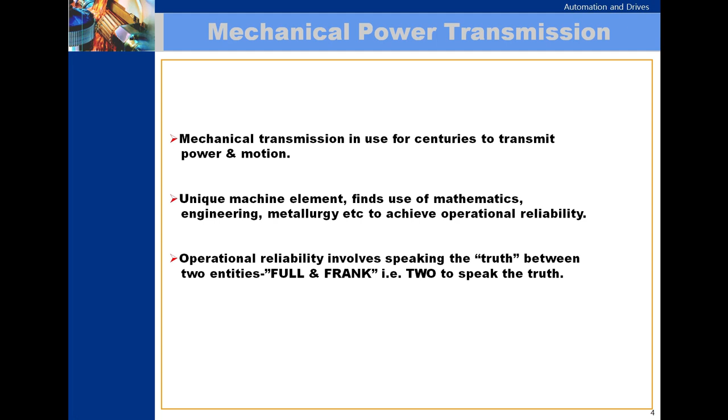Gearboxes service, maintenance and condition. We will see in this video the topics of selection, operation and maintenance. Mechanical transmissions have been in use for centuries for transmitting power and motion. This unique machine element makes use of mathematics, engineering, metallurgy, etc. to achieve operational reliability.

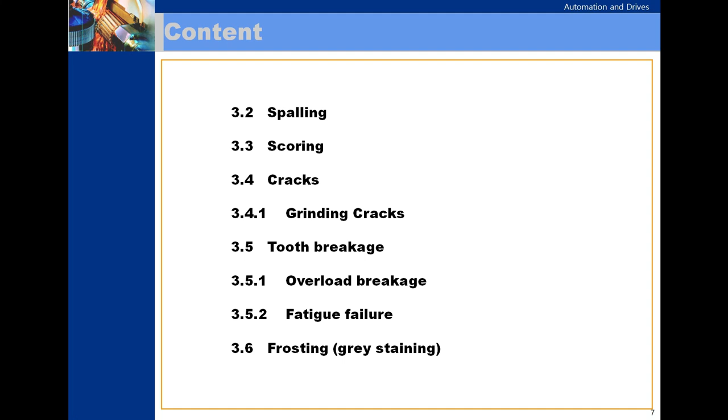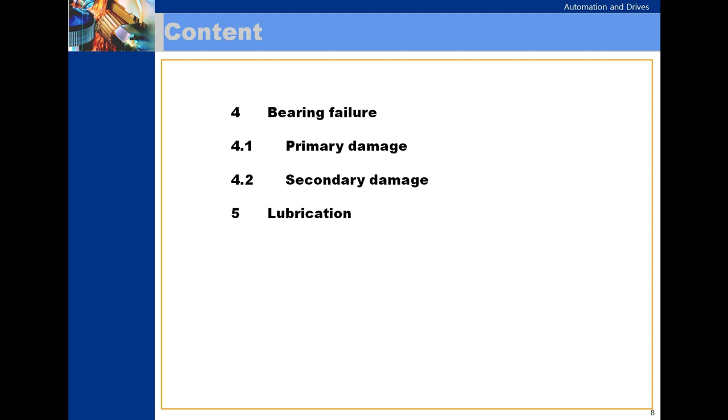Operational reliability involves the full and frank truth between two entities. The main topics here are failure analysis, gear contact patterns, gear damage, pitting (initial pitting, destructive pitting, secondary pitting), spalling, scoring, cracks, grinding cracks, tooth breakage, overload breakage, fatigue failure, frosting (gray staining), bearing failure, primary damage, secondary damage, and finally lubrication. Basic criteria for proper selection of gear units are mechanical rating, thermal rating, bearing lifetime, type of lubrication, special requirements, and other accessories.

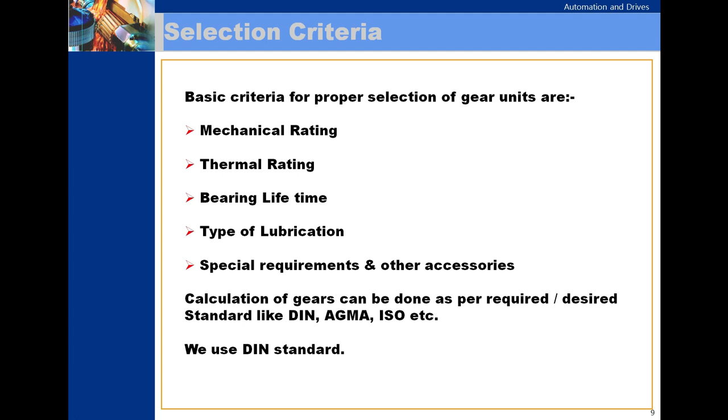Selection as per mechanical rating requires data such as type of prime mover, type of driven machine, daily service and duty condition in hours per day, motor power in kilowatts, motor speed in rpm, output speed in rpm, the service factor, starts per hour, actual or effective output power in kilowatts, relative position of input or output shafts, and handing of gear units.

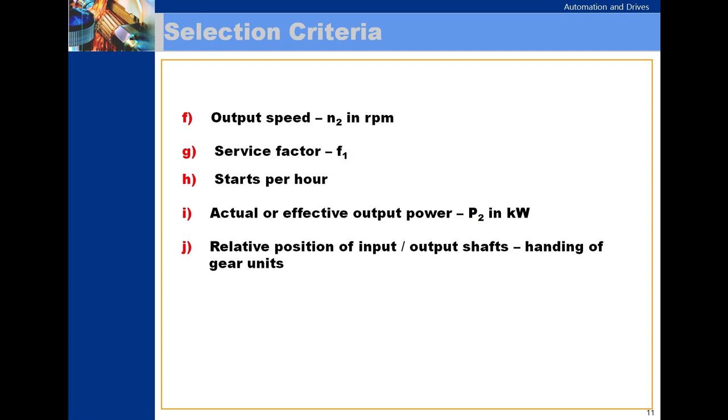Selection as per thermal rating requires data such as ambient conditions, open space, small or large premises, ambient temperature in degrees centigrade (minimum and maximum), operating cycles per hour in percentage, and wind velocity.

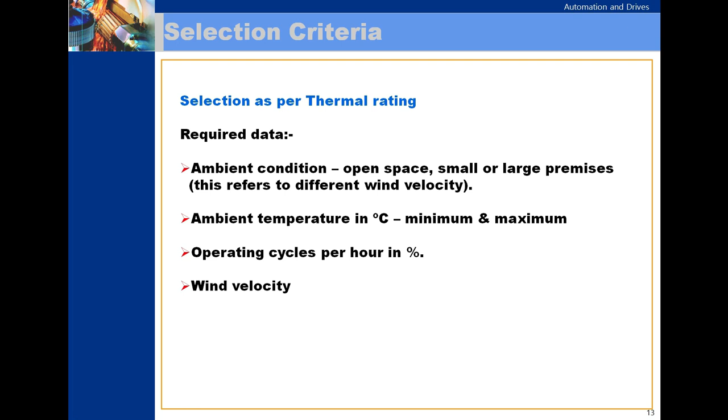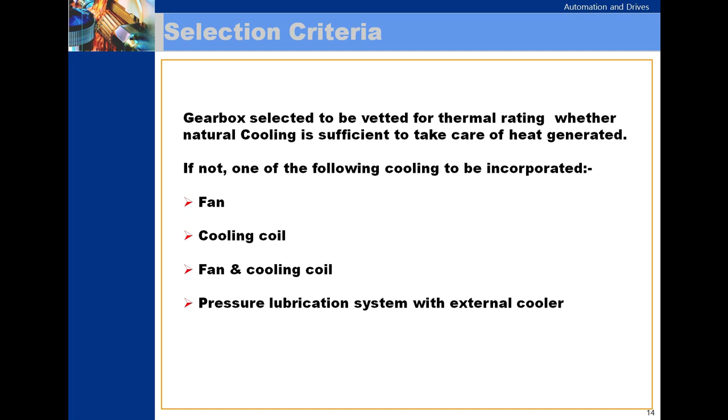The gearbox selected should be vetted for thermal rating to check whether natural cooling is sufficient to handle heat generated. If not, one of the following cooling methods should be incorporated: fan cooling, cooling by fan and cooling coil, or pressure lubrication system with external cooler.

Types of lubricant: normally mineral based oil of 320 or 460 viscosity at 40 degrees centigrade. For splash lubrication, 460 VG viscosity oil is used, and for pressure lubrication, 320.

Excess oil leads to churning losses and higher temperature with added pressure on seals. Ideally, temperature should be restricted to 90 degrees centigrade, while safe up to 95 degrees centigrade, beyond which oil life drastically reduces. For every 10 degrees above 65 degrees, oil life gets halved.

Unforeseen load or force and external vibration, if not accounted for during selection, can cause sudden failure, partial or whole. Improper mounting and commissioning will also lead to failures. The following hints will help avoid unnecessary failure.

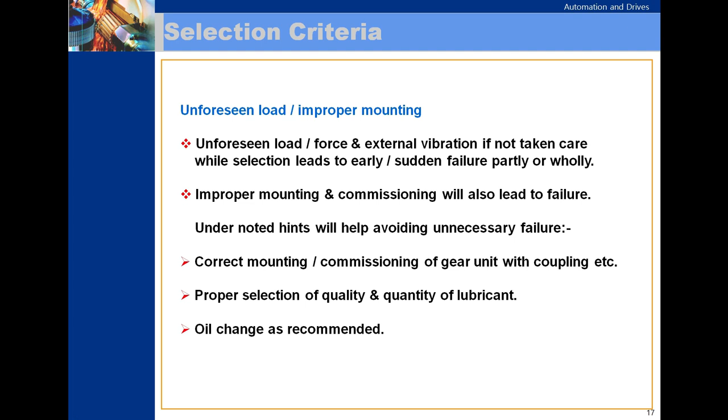Correct mounting and commissioning of the gear unit with the coupling, etc. Proper selection of quality and quantity of lubricant. Oil change as recommended. Regular checks of seals, lubricant, temperature, noise and vibration.

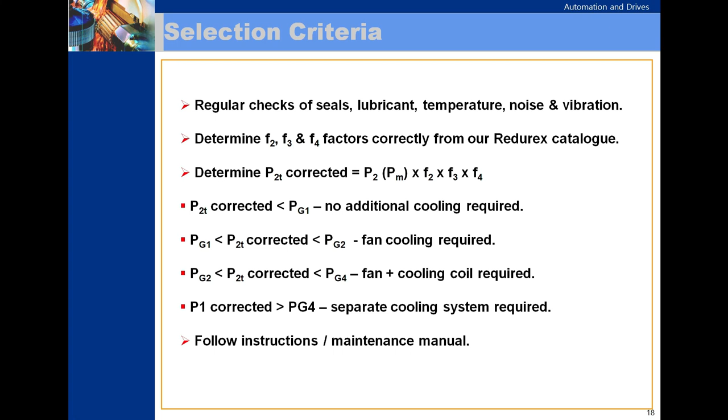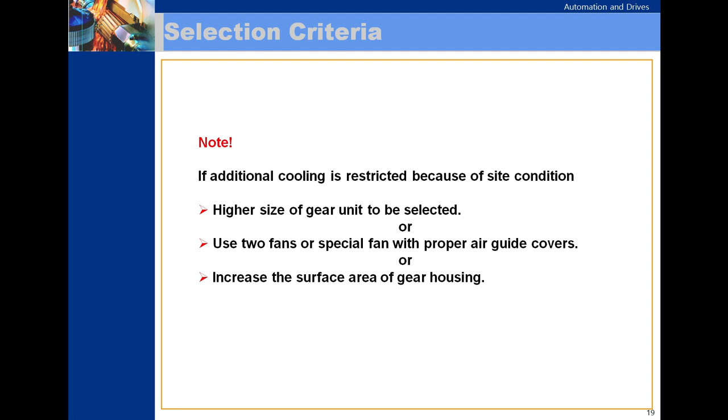Note: if additional cooling is restricted because of site conditions, a higher size of gear unit should be selected, or use two fans or a special fan with proper air guide covers, or increase the surface area of the gear housing.

Lubrication is chosen depending on circumferential speed. Circumferential speed of pitch circle lesser than 15 meters per second means splash lubrication. Circumferential speed of pitch circle greater than 15 meters per second means pressurized lubrication. Note: forced lubrication system is mostly a combination of splash and pressure.

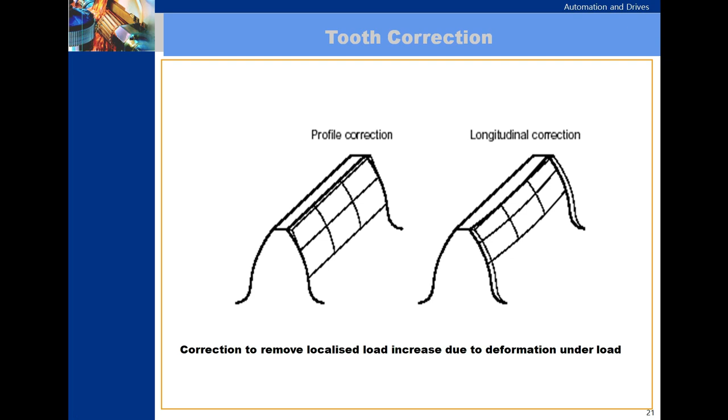Tooth correction: profile correction and longitudinal correction. Correction removes localized load increase due to deformation under load.

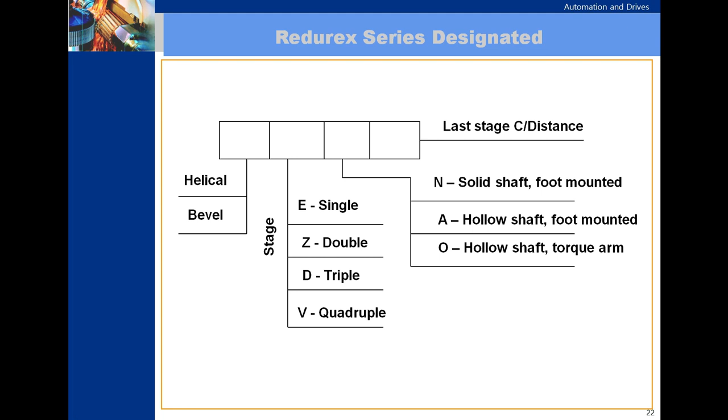The series design nomenclature can be found by seeing the nameplate: helical bevel, E for single, Z for double, D for triple, V for quadruple stage, N for solid shaft, A for hollow shaft, O for hollow shaft with torque arm. The last one or two digits indicate the stage and size, ranging from 1 to 26.

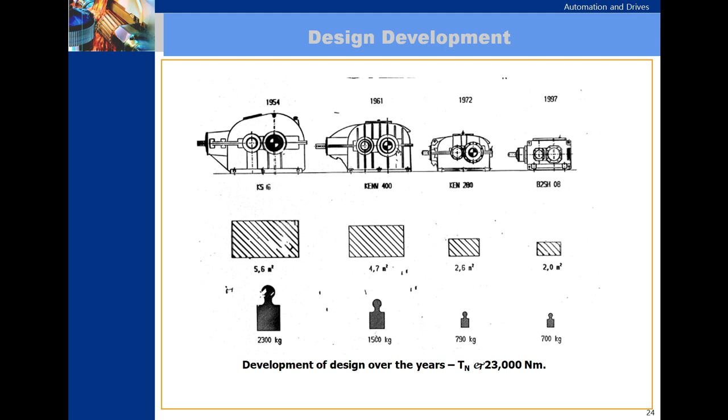Development of design over the years: torque up to 23,000 newton meters. The past tendency prevailing in industry with respect to gearing is to raise power levels to an ever increasing extent while decreasing physical size and using less weight. Improvements were developed by changing tooth profile, using higher quality materials, upgrading surface finish, hobbing with protuberance, using effective heat treatment processes, using other types of lubricants, and so on.

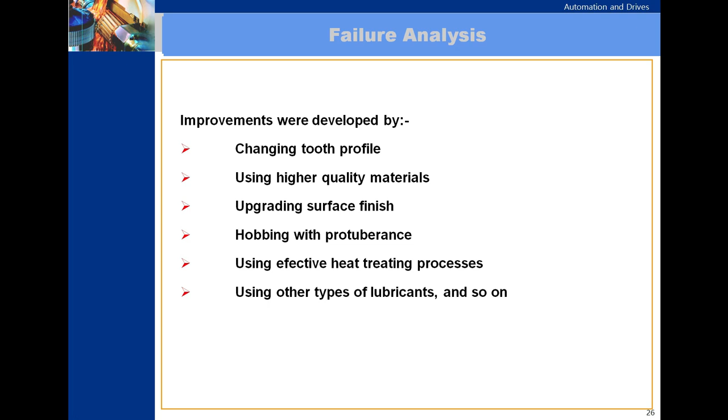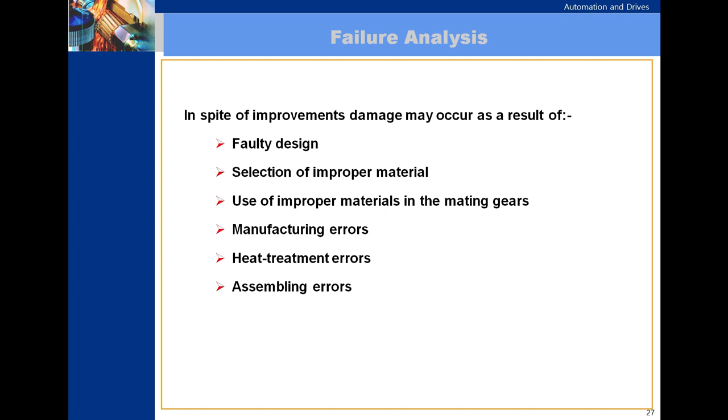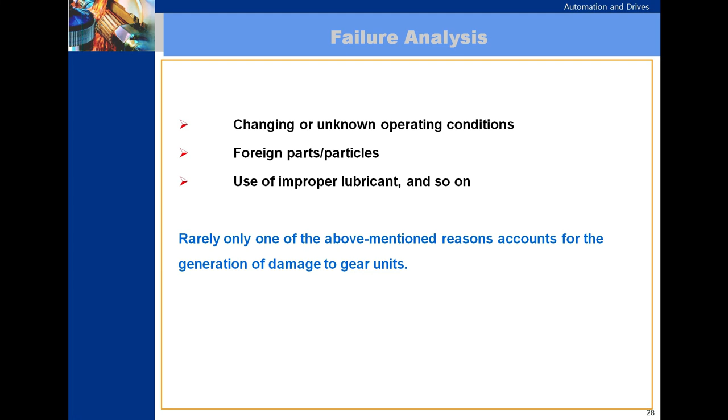In spite of improvements, damage may occur as a result of faulty design, selection of improper material, use of improper materials in mating gears, manufacturing errors, heat treatment errors, assembling errors, changing or unknown operational conditions, foreign parts or particles, use of improper lubricants, and so on. Rarely does only one of these reasons account for the damage to gear units.

Assessment of damage in gearing requires in-depth knowledge of gear contact patterns, gear tooth failure modes, and lubricant systems. Faulty contact patterns develop when load is applied on only one end of the tooth, causing failure due to manufacturing defects, failure during assembly, or adverse effects during operation.

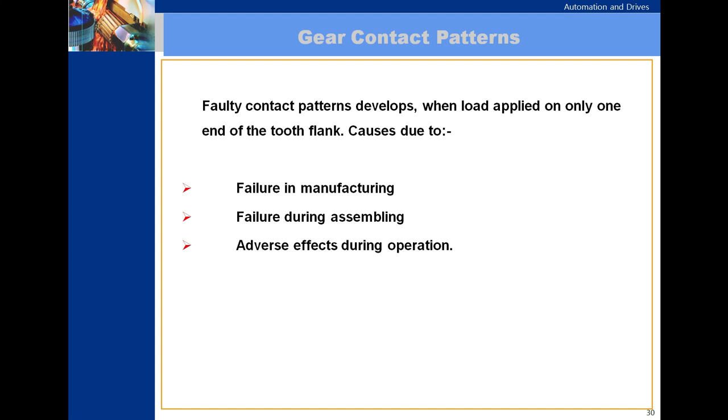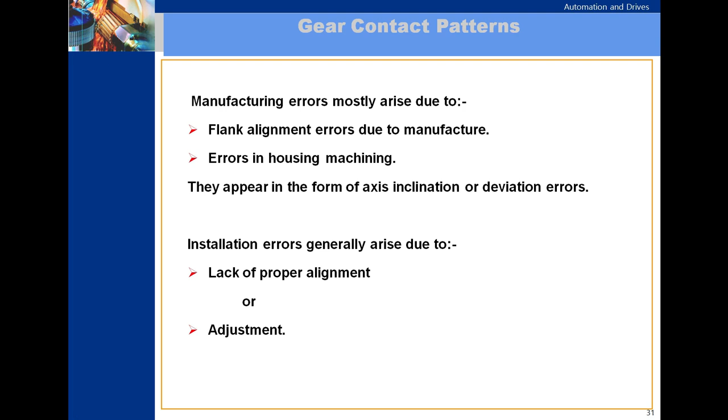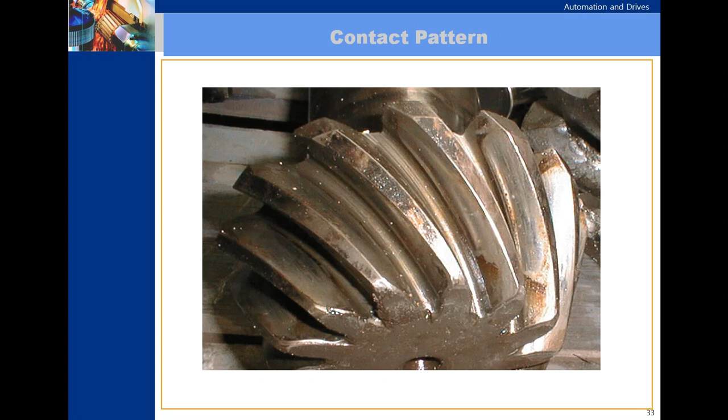Manufacturing errors mostly arise due to flank alignment errors during manufacture, or errors in housing machining. They appear in the form of axis inclination or deviation errors. Installation errors generally arise due to lack of proper alignment or adjustment. Adverse effects in operation mostly involve alignment errors, tension load, or vibrations. In the contact pattern shown here, you can see only part of the tooth flank is worn out, indicating a matching tooth contact issue.

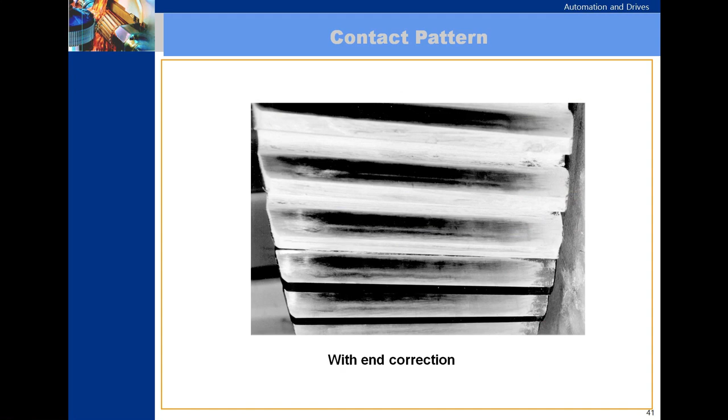Bearing damage. In machines, bearings are among the most important components, subject to heavy demands on their load bearing capacity, and as a result continue to be the subject of intensive research and development. This R&D allows calculation of bearing life to a high degree of accuracy.

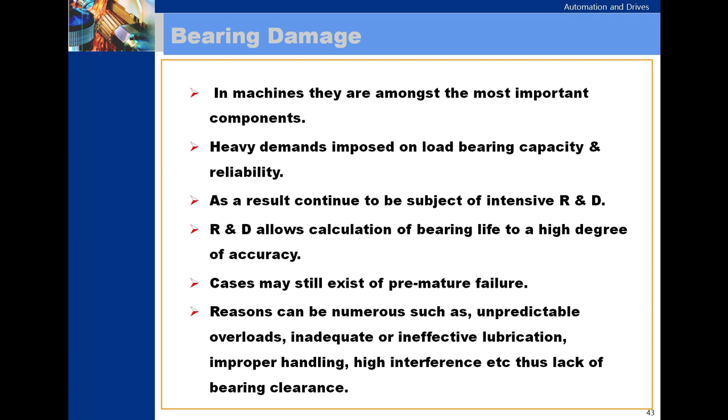Cases may still exist of premature failure. Reasons can be numerous, such as unpredictable overloads, inadequate or ineffective lubrication, improper handling, high interference, or lack of bearing clearance. Any of these factors results in its own typical failure, reflecting a characteristic failure pattern on the bearing, so it is feasible at an early stage to identify the failure cause and take appropriate measures to avoid recurrence.

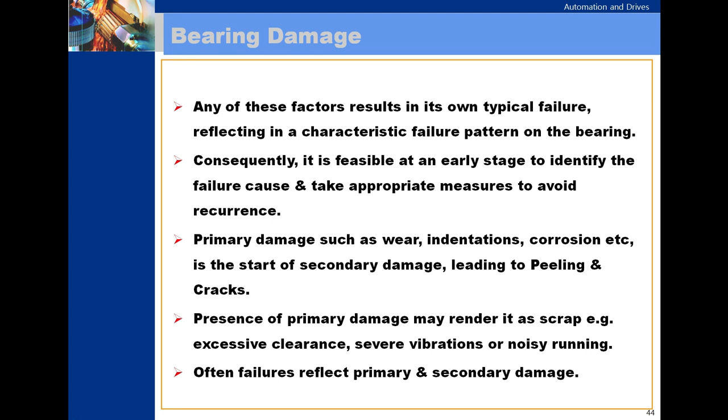Primary damage, such as wear, indentations, corrosion, etc., is the start of secondary damage leading to peeling and cracks. Presence of primary damage may render a bearing as scrap, for example excessive clearance, severe vibrations, or noisy running. Often failures reflect both primary and secondary damage, whereas normally wear will not be observed in anti-friction bearings. Wear may however occur if foreign particles enter the bearing or lubrication is inadequate.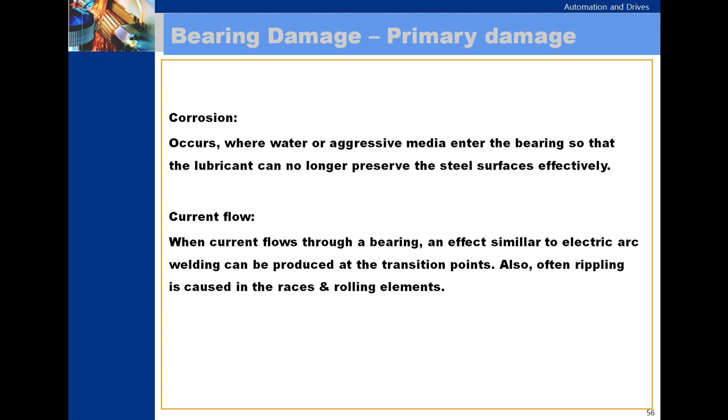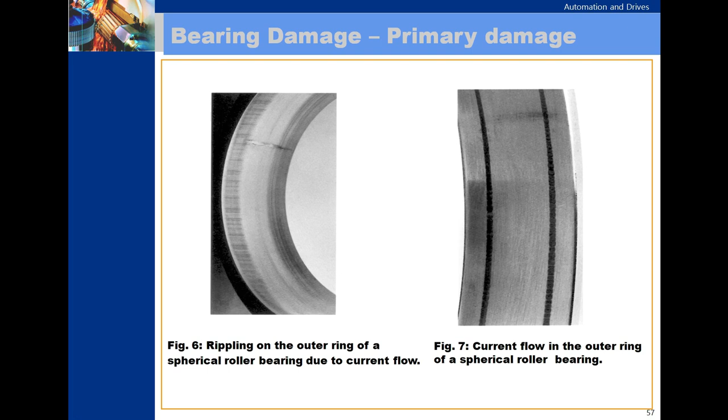Current flow. When current flows through a bearing, an effect similar to electric arc welding can be produced at the transition points, often causing rippling in the races and rolling elements. You can see the rippling on the outer ring of this spherical roller bearing, clearly caused by current flow.

Peeling is a result of normal fatigue when a bearing is near the end of its useful life. This condition is indicated by the generation of more noise and vibration. Premature peeling can be due to inadmissible loads, corrosion, current flow, or smearing.

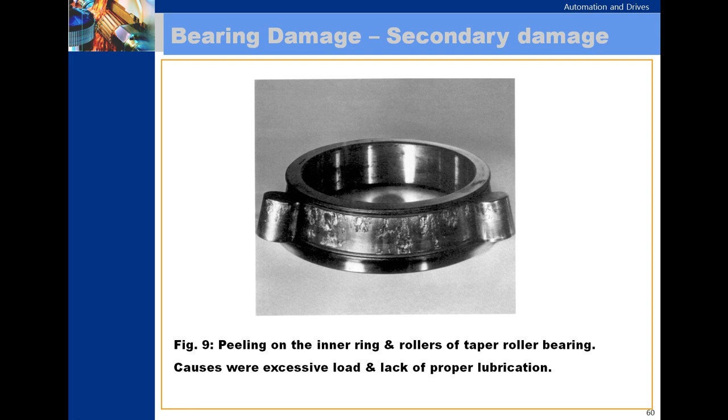Progressive stages of peeling action. Peeling on the inner ring and rollers of a taper roller bearing is caused by wear, excessive load, and lack of proper lubrication. Peeling on the inner ring of a spherical roller bearing occurs when the ratio of axial to radial load is very high.

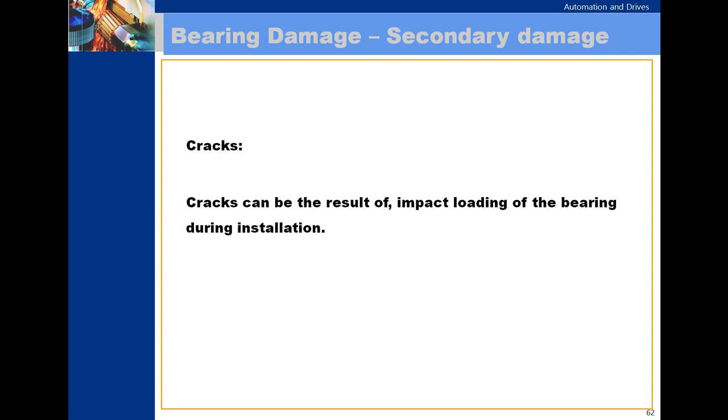Cracks can result from impact loading of the bearing during installation. Visual appearance: cracks or metal fragments broken away, as a rule on one side of the bearing ring, blows with a hammer or hardened mandrel against the bearing ring during installation.

Action: always use a soft mandrel or fitting sleeve for installation. The bearing ring can break in the transverse direction and float on the shaft from using too much force in pressing the bearing onto the tapered seat. Follow the supplier's installation instructions.

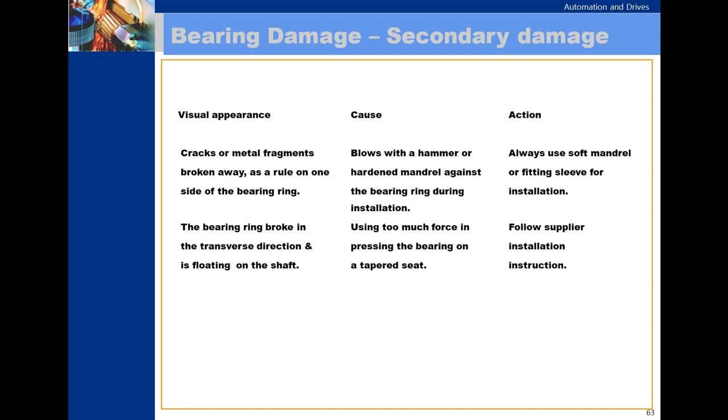Bearing handling, do's and don'ts.

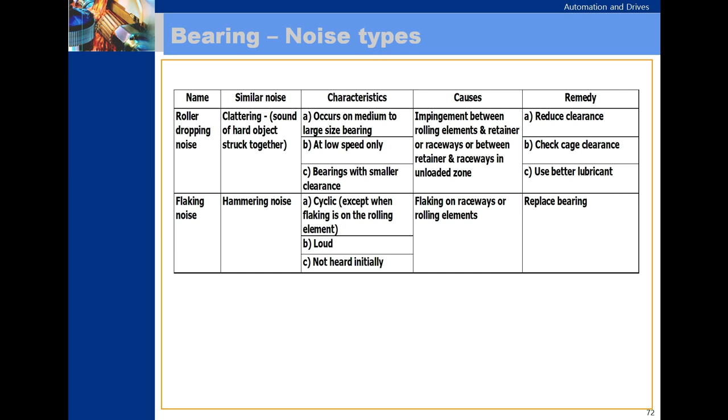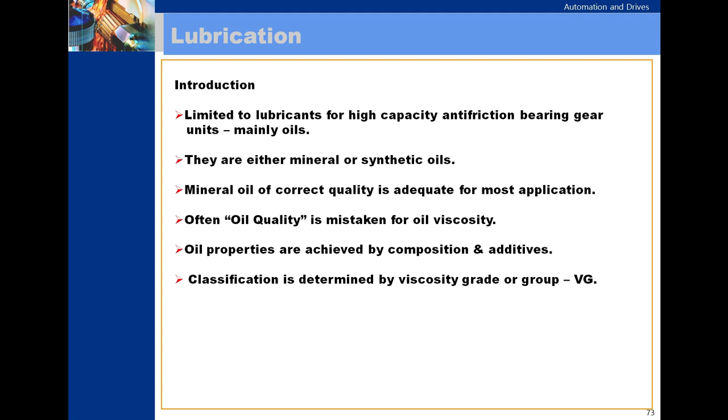Kinematic viscosity in millimeters squared per second is the mostly accepted measure. The grade comprises a range with a midpoint viscosity of plus or minus 10%, that is VG 320 covers the range 288 to 352 at 40 degrees centigrade.

The viscosity groups generally used are VG 220, 320, and 460. Functional requirements: reduce the coefficient of friction in tooth mesh and anti-friction bearings, and disperse thermal energy from friction points within the gearbox to the housing walls and thus to the atmosphere.

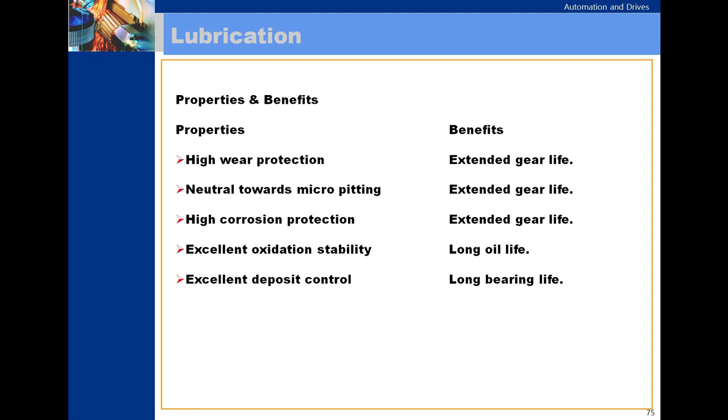Properties and benefits: high wear protection extends gear life; neutral towards micro pitting extends gear life; high corrosion protection extends gear life; excellent oxidation stability gives long oil life; excellent deposit control means long bearing life.

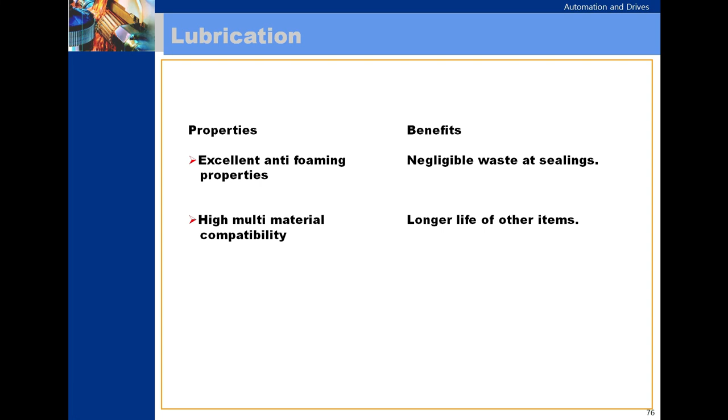Excellent anti-foaming properties mean negligible waste at sealings. High multi-material compatibility means longer life of other items.

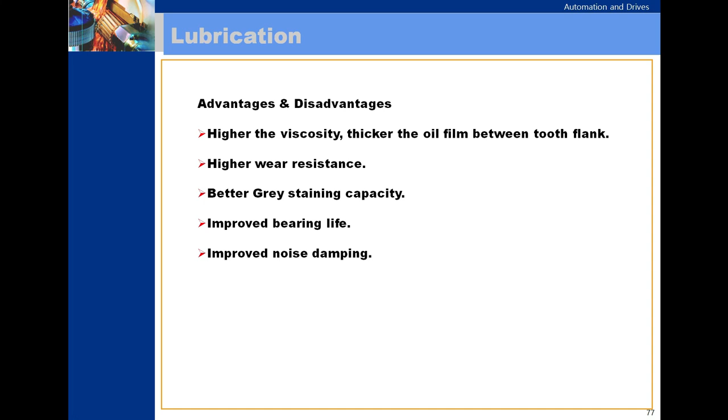Advantages and disadvantages of lubrication: the higher the viscosity, the thicker the oil film between the tooth flanks, giving higher wear resistance, better grey staining capacity, improved bearing life, and improved noise damping. Disadvantages include poor flow and higher churning losses.

Limits: kinematic viscosity of 50,000 millimeters squared per second or higher will not flow satisfactorily. For pumps at 1500 rpm, permissible viscosity should be less than 5000 millimeters squared per second. Kinematic viscosity below 25 millimeters squared per second will not ensure load carrying property, as the oil film becomes too thin.

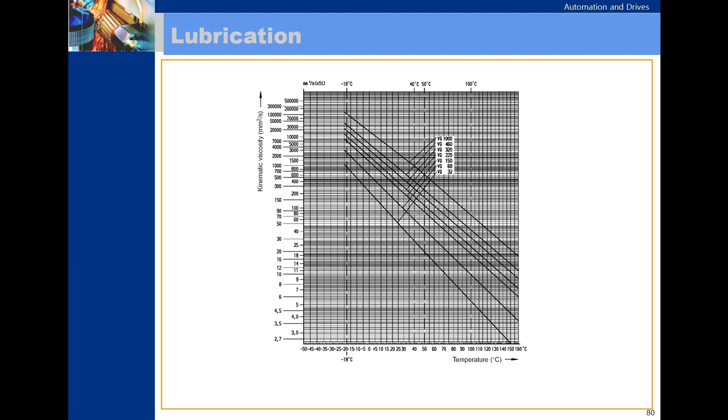Scuffing capacity: bearing load means that scuffing failure during load is only just avoided. The scuffing capacity of an oil is determined by the FZG test, during which load is increased stage by stage according to precise specifications in a standardized gear unit.

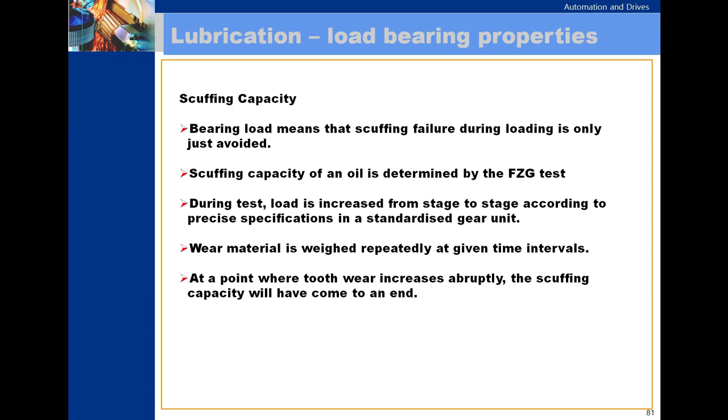Wear material is weighed repeatedly at given time intervals. At the point where tooth wear increases abruptly, the scuffing capacity will have come to an end. Suitability of the oil requires the minimum load stage of 12 plus.

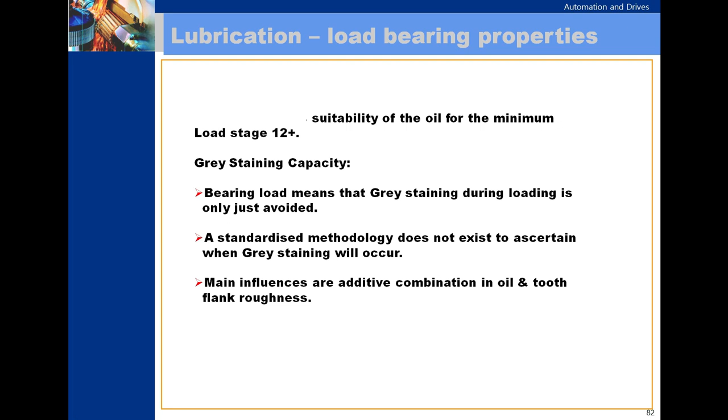Gray staining capacity: the bearing load means that gray staining during load is only just avoided. A standardized methodology does not exist to ascertain when gray staining will occur. Main influences are the additive combination in the oil and tooth flank roughness.

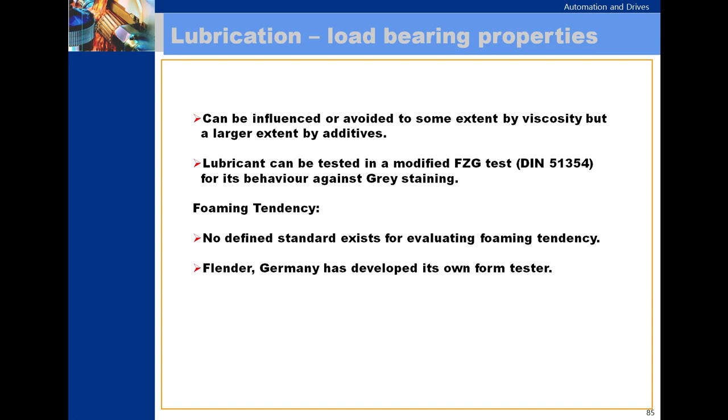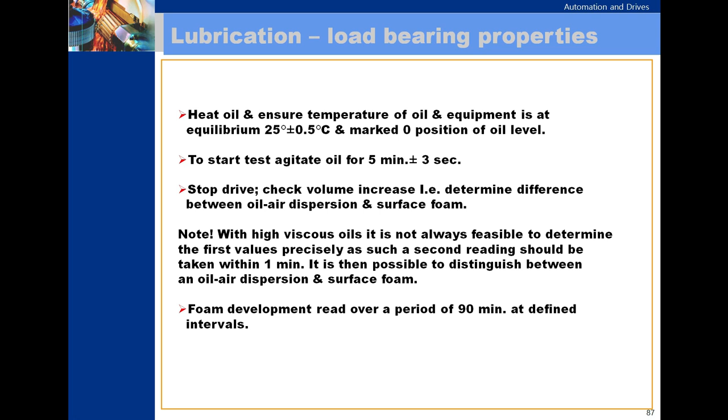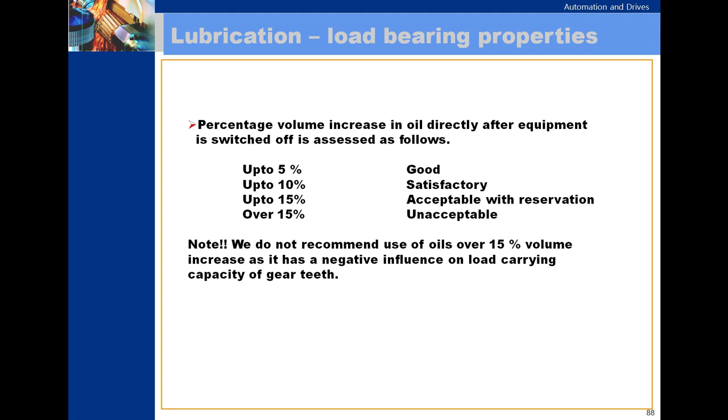Mineral oils are produced from crude oil.

Here comes the synthetic oil.

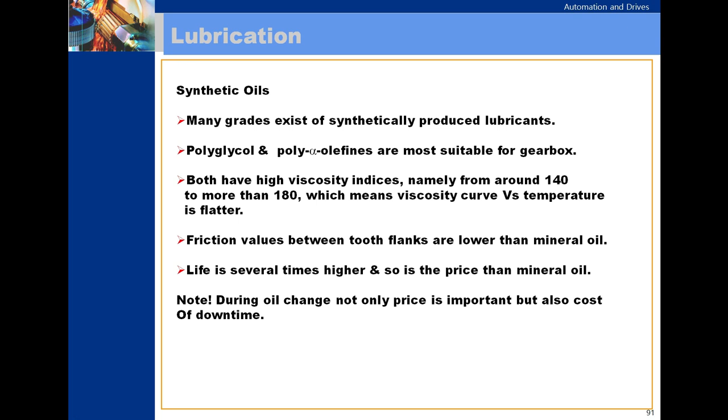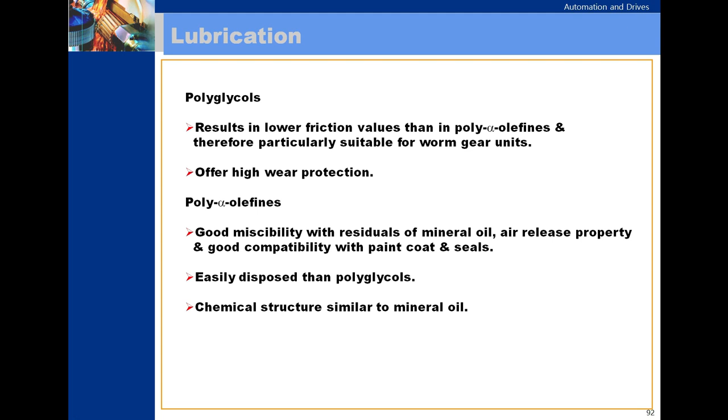Mineral oil comparison, you can see here.